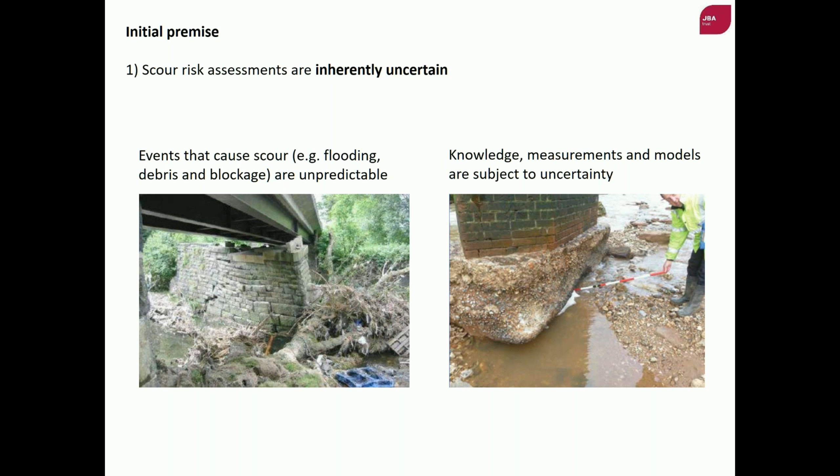A second source of uncertainty is that our knowledge and ability to measure physical parameters and processes, and model them empirically with physical models, is also subject to some uncertainty. The second aspect of our initial premise was that uncertainty manifests itself as a residual risk of bridge failures. So despite the very comprehensive protocols and actions taken to mitigate scour risk on an ongoing basis, structural failures and even collapse of bridges do still occur.

An example here is some data from the British Railway Network. This is a database of historical railway bridge failures that we published in 2014, covering the history between 1846 and 2013, where there have been around 100 documented failures of rail bridges due to scour. For many of those events, we've been able to reconstruct the hydrological conditions associated with those failures.

So two things to note from this. One is that failures have occurred even during the relatively recent past, when the industry has had well-developed and mature risk mitigation measures in place. And secondly, the trigger events, the magnitude of the event expressed in terms of the return period of the flood, is very variable across those failure events.

So there's some uncertainty clearly about how we would in fact predict a vulnerability to scour failure.

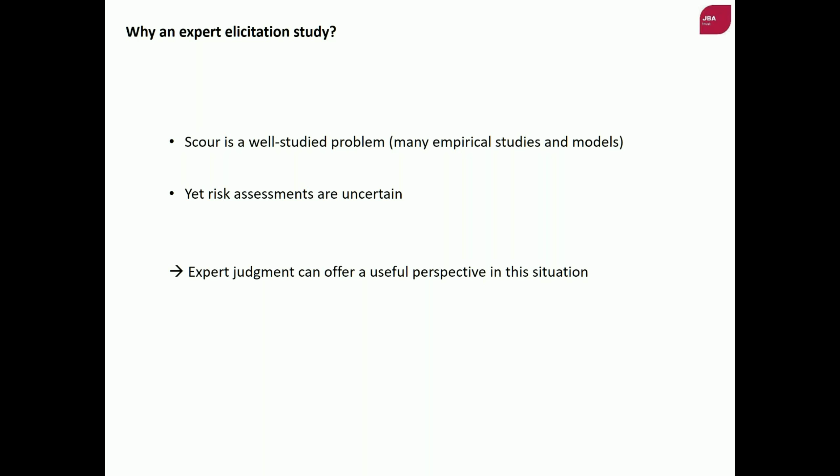This is exactly the kind of situation where we have both a depth of expert knowledge and also a high level of residual risk and uncertainty, where expert judgment has been found to offer a useful alternative perspective in addition to quantitative studies. So the methodology we adopted was a statistically robust elicitation methodology.

It was developed by Roger Cooke at TU Delft in the Netherlands, and has been applied to date in many studies, well over 80 expert elicitation studies across a range of fields, including nuclear safety, climate change, biological hazards, and so on.

Key elements of Cooke's methodology are that the judgments of a group of experts are pooled, and that pooling process, that averaging, helps to encourage robustness in the elicitation results.

And secondly, very importantly, individual experts' judgments within the process are weighted based on what can best be described as a form of calibration process.

That calibration process works in two ways. To some extent, it weights experts based on how well they answer questions that are broadly similar to the questions that are the topic of the study, and how accurate their answers are. But it also crucially looks at how good those experts are at judging uncertainty when they're not sure of the true answer to a question.

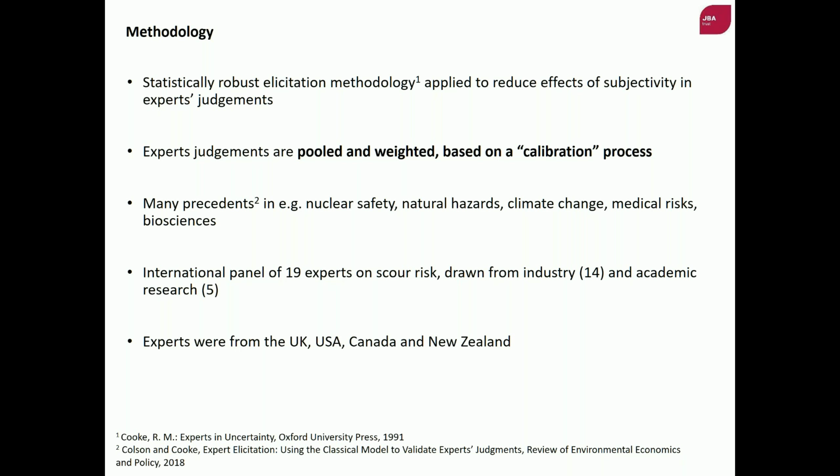So the first technical question for the experts was essentially what that load variable should be. Then we want to know what the curve itself should look like - how would it be parameterized, what shape should it have? And finally, something that's perhaps sometimes overlooked, is an assessment of the uncertainty about such a function - what could our confidence be in a fragility function for scour?

Through the elicitation process, we asked our experts about a wide range of potential risk factors that could be used as loading conditions in a fragility analysis. We looked both at piers and abutments to check for any differences that might be relevant for the two different elements of a structure.

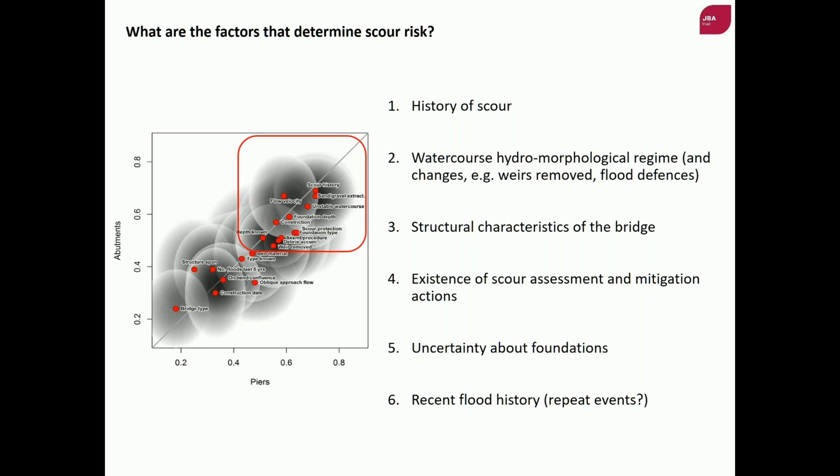The second thing that emerged as being quite important that I would draw attention to here was considering recent flood history, and in particular the occurrence of sequences of events that could cause cumulative scour damage.

From that part of the study, we then moved on to ask our experts to make some numerical judgments about failure probabilities. We gave them a set of idealized bridge and watercourse types and a series of idealized assumptions, scenarios for risk assessment and mitigation protocols. I can't show all of those results in one slide.

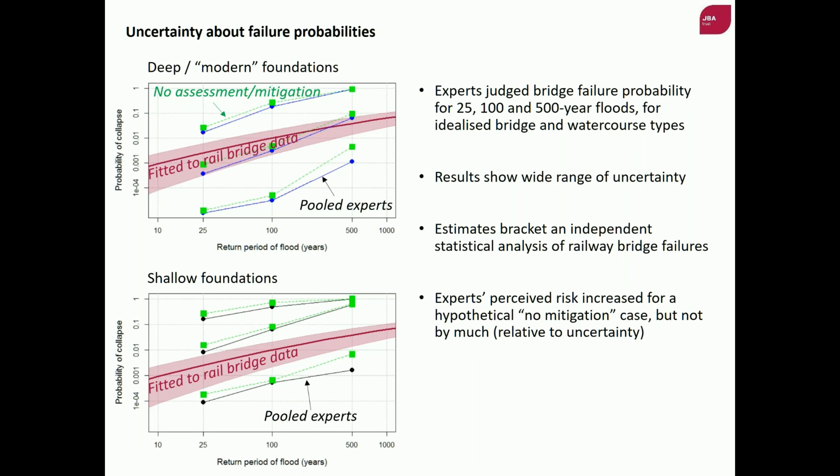So, to briefly cover the conclusions, we felt that our experts' views on potential risk factors for scour were broadly consistent with industry practice, but they did perhaps emphasise the importance of sequences of flood events and the broader hydromorphological regime of a watercourse as being important. There's a need there to think about suitable metrics that could reflect those factors within a risk assessment protocol.

They also, as I said, identified very wide uncertainties about failure probabilities, and they did that even after accounting for the presence of investments in risk mitigation and risk assessment. I think, if anything, that really just underlines the need for us to continue developing more comprehensive monitoring and assessment methods to try to constrain those uncertainties.

And to me, that's the kind of thing that I'm hoping that we'll hear about in talks in the rest of this webinar. I very much look forward to seeing the following talks. So I'll finish there. Thank you very much.

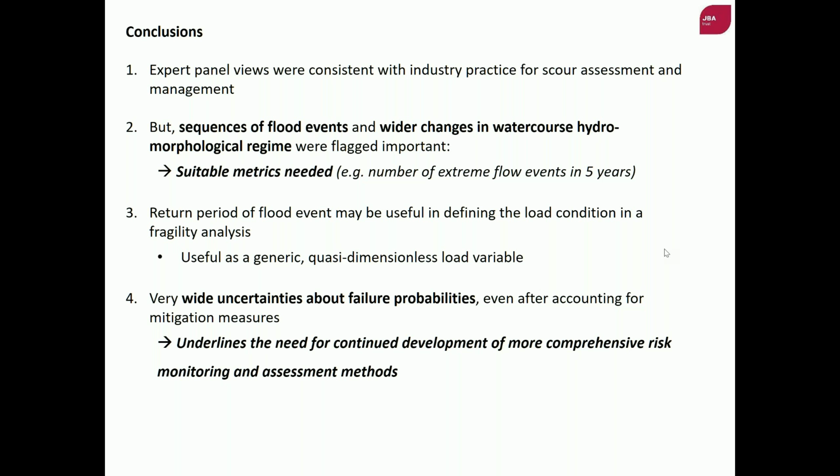Thank you, Owen, and I think this presentation will tie quite nicely into where Rob Lamb just finished there, talking about the development of novel assessment methods. The presentation I'll be giving today presents output from the Natural Environment Research Council ERIIP project that was awarded to myself and my co-investigator Trevor Hoey, and I'd also like to acknowledge John Maniatis, who was the research assistant on that project, and also Will Carroll and John Hicks at Scottish Water.

Just a very quick overview of the ERIIP programme. There were three major themes for research grants within the ERIIP programme. The presentation I'm going to give you today addresses theme one, identifying, understanding and quantifying environmental risk to an infrastructure system, and also theme three, dealing with uncertainty, particularly how we deal with uncertainty with respect to making asset management decisions. So I'll be talking today about the development of a protocol for Scottish Water's asset management of pipeline crossings.

Within the context of managing pipeline crossings, there are some broad management challenges that really cross across the whole infrastructure sector. Here in the UK, our ageing infrastructure and the associated challenges with that, extreme weather events, but also the development of novel information communication technology, the emergence of electronic asset management databases, often enabling asset inspectors to acquire data in the field using ruggedized tablet computers, acquiring georeferenced images, and also entering free text or making choices in drop-down boxes within those asset management platforms.

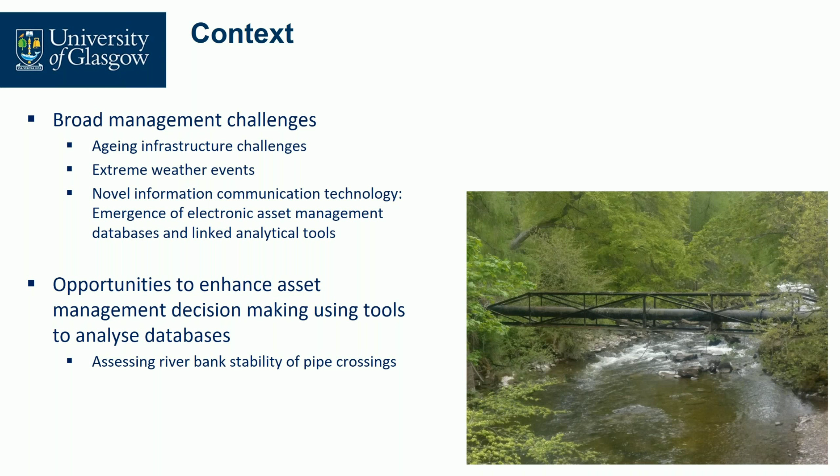Scottish Water provides water and wastewater services to 2.5 million homes in Scotland and 156,000 business properties. They've got an extensive pipe crossing network. Their drinking water network is 48,000 kilometres long, and their wastewater pipe network is 51,000 kilometres long.

River crossings within that network are essentially some of the most vulnerable nodes. They're at risk both from vertical scour and lateral bank erosion. It's the latter, the horizontal movement of rivers, that I'm focusing upon today rather than vertical scour of the river bed. We're thinking about the movement of channels left or right across the floodplain and what that might mean for pipeline crossing structures.

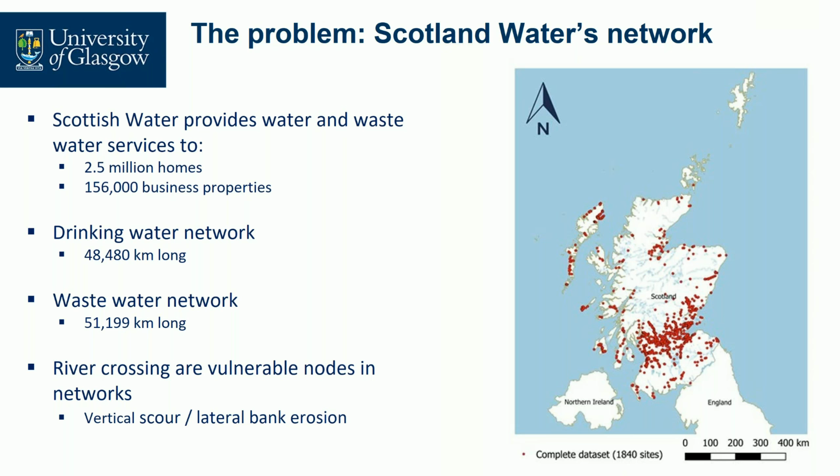I'm a fluvial geomorphologist, and the first thing to note is that in Scotland, as elsewhere, there's an incredible diversity of river environments. In upland areas, crossings might be in boulder bed or bedrock reaches. Further downstream, we might have a fluvial geomorphology predominantly characterized by actively meandering reaches.

Some of those reaches might be natural, some banks might have protection, some rivers might have been straightened. There might be cohesive bank materials such as clays, or alluvial gravels, sand and cobbles making up the bank substrate. All of those crossings cross over a whole variety of different styles of rivers, which adds to the complexity of scoring the risk associated with each crossing from a river stability perspective.

When we started this project, we looked at bridge scour assessment manuals, which tend to focus upon vertical scour rather than lateral erosion, and often characterize risk assessment frameworks for transport bridges or bridges with abutments rather than pipeline crossings, which often span right across the river, with concrete structures often set back on top of the banks, enabling the river sometimes to erode on the outer banks immediately beneath the structure.

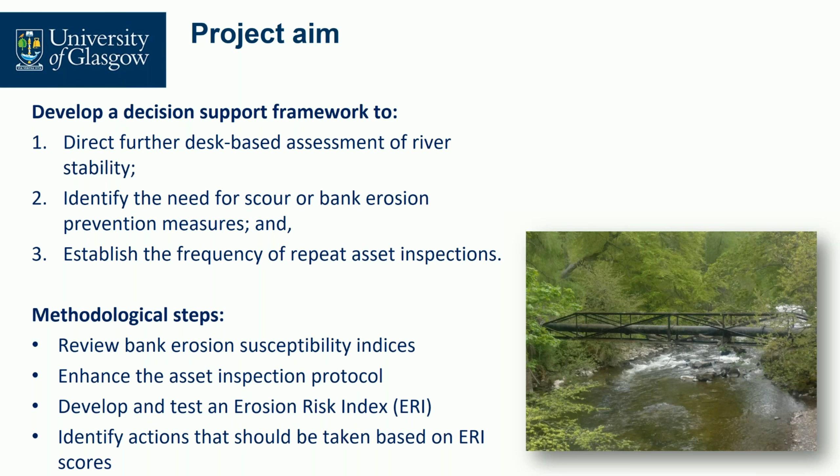As I mentioned earlier, I'm a fluvial geomorphologist. In fluvial geomorphology, a whole range of different approaches have been taken to characterize the geomorphology and the stability of rivers.

Things like Angela Gurnell's MoRPh framework, Gary Brierley's River Styles, and Tim Beechie's natural channel classification approaches are all widely used by fluvial geomorphologists, but they often require extensive information about a river catchment upstream and downstream of a crossing, and also considerable survey data in the reach that's actually of interest.

So we tried to find existing approaches that could be used to score bank erosion at a particular site. A review was completed by Connell in 2012, showing three indices: a bank erosion susceptibility index, a bank erosion hazard index, and a bank erosion potential index. All of these require a relatively high degree of input data to calculate, such as measuring the angle of a bank, using quadrat surveys to measure the distribution of vegetation, measuring root density, riparian diversity, bank material, etc.

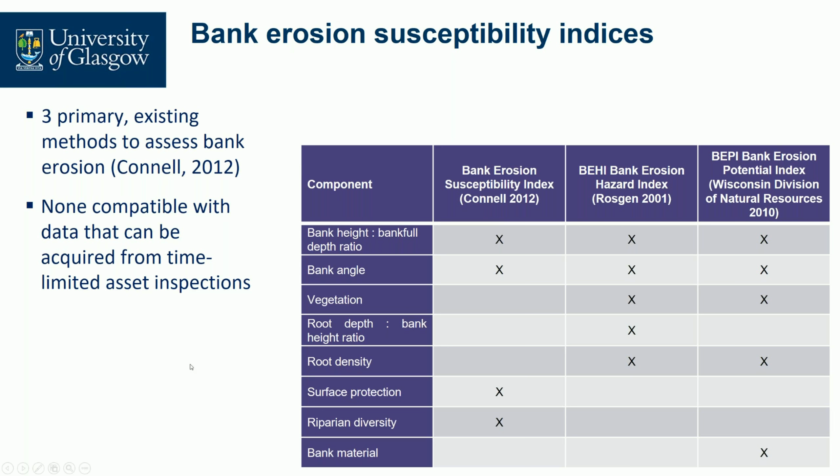So we decided that we needed to develop a simpler index that could use data that could be quickly acquired by an asset inspector within 10 or 15 minutes of arriving on site.

Initially, when Scottish Water started using their mobile app to acquire data at pipeline crossings, a lot of the photos were focused upon the structural elements of the river crossing itself. To properly assess the geomorphology of the river upstream and downstream of the crossing, as well as immediately below it, we needed to change the guidance given to asset inspectors, making sure they positioned themselves to acquire photographic coverage of the river on the left and right banks, both upstream and downstream of the pipeline crossing, as well as immediately beneath it.

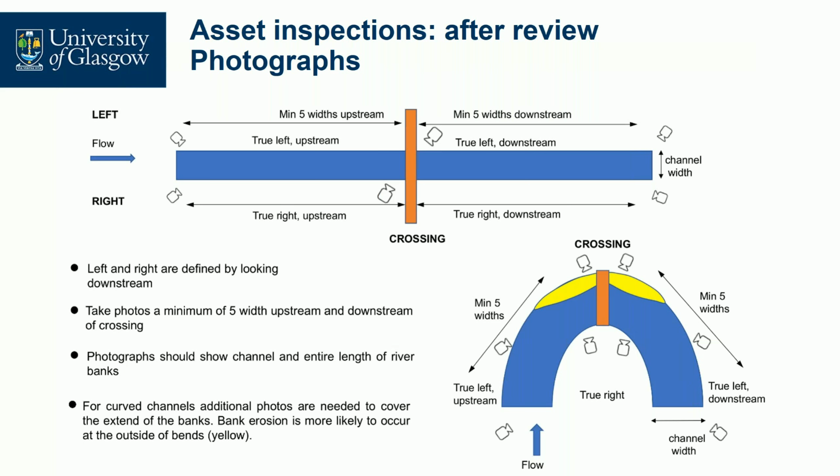This is extracted from a report we developed, showing inspectors where they should be taking images, so that we could develop a protocol to assess the coverage of vegetation and any evidence of bank erosion across that section from 5 widths upstream to 5 widths downstream, to identify whether the crossing was at risk from bank instability.

We identify whether there's active bank erosion beneath the crossing, whether there's active bank erosion upstream or downstream of the crossing, and whether bank protection exists beneath the crossing and upstream or downstream. We also identify the bank angle, and the presence or absence of vegetation, on the basis that vegetation offers resistance against active bank erosion.

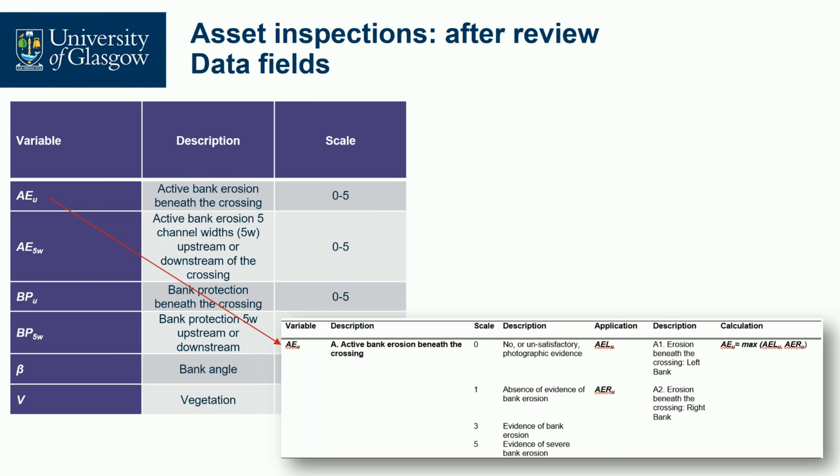For each of these variables, we developed a scale ranging from 0 through to 5, compatible with Scottish Water's existing system, and developed a procedure for asset inspectors in the office to look at the photographic evidence and rate each of these variables on this 0 to 5 scale.

The rest of our project work focused on testing a framework to determine the calculation method for the erosion risk index, and assessing whether it correctly identified high-risk sites. We then looked at whether there was user bias between people undertaking the scoring, and whether there was consistency in the methodology between desk-based inspections by asset managers at Scottish Water, experienced geomorphologists from our research group at the University of Glasgow, and site visits assessing susceptibility in person rather than using photographic evidence.

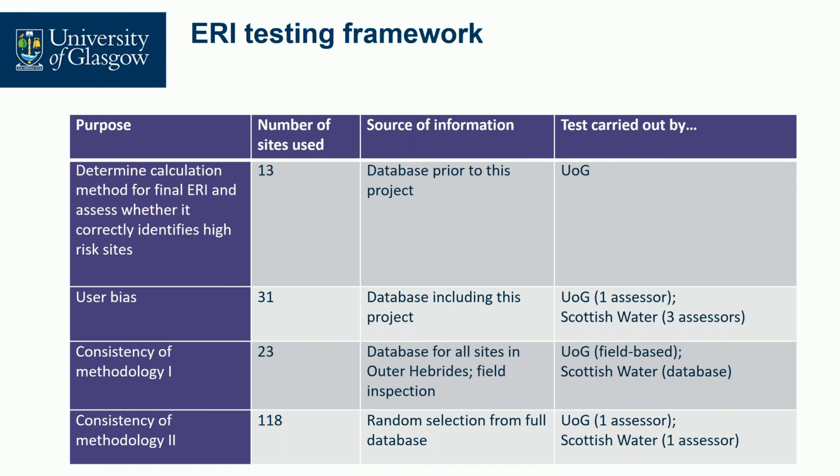We tried 4 different calculation methods for the erosion risk index: a probabilistic weighted index, a weighted addition approach, a simple multiplication approach, and a weighted scaled mean. It was that latter weighted scaled mean that performed best at discriminating between different degrees of bank erosion at different sites.

We also added a data quality element to that ERI score to ensure that where photographic evidence wasn't available, perhaps because of high vegetation or missing photos, the resulting ERI score would be sufficiently low to prompt a resurvey.

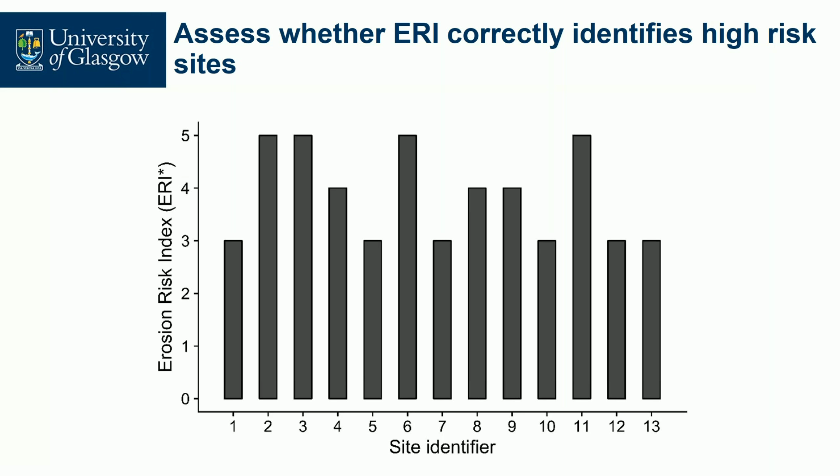Next, we're particularly interested in user bias. So we devised a method where we tested 31 sites; 3 asset assessors at Scottish Water and George Maniatis at University of Glasgow independently used the workflow to calculate the erosion risk index at each of these sites.

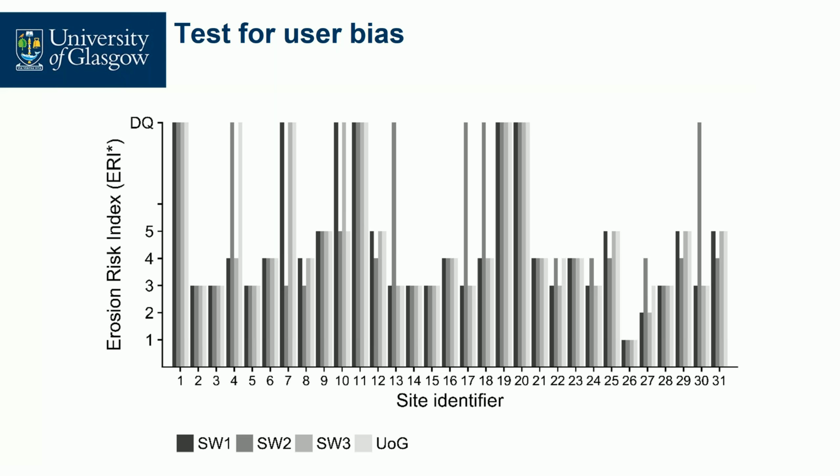From the results, we can see there's general convergence of results at particular sites, often agreement where there are data quality issues, and a lot of those data quality issues were images taken in the summer when vegetation was too high, or images that didn't show the full extent of the banks upstream and downstream.

Our final testing looked at the consistency of the methodology with field inspections. Several of us travelled to the Outer Hebrides and applied the erosion risk index methodology on site. At the same time, Scottish Water blindly calculated the erosion risk index at each of these sites for these 23 crossings.

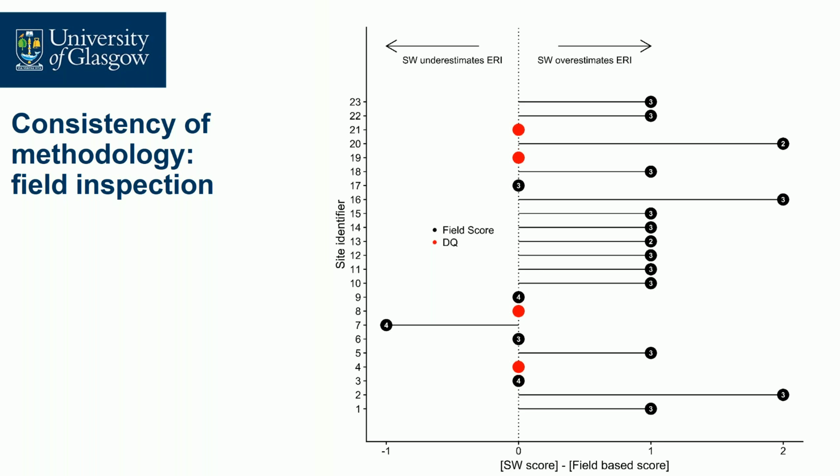The desk-based assessment overscored 14 of the 23 sites. 4 sites had the same score, and 1 site scored higher in field assessment. So if anything, the desk-based assessment is overscoring rather than underscoring, which is the direction we would want this to be in.

Our final component of testing was to select 118 random sites from the 1,500 in the database. 69 of those sites agreed between the desk-based assessment by Scottish Water and the desk-based University of Glasgow researcher assessment. 25 sites had data quality issues, and there wasn't a systematic bias for the sites where there was a difference.

The 24 sites where there's a difference of 1 in the scores - there wasn't a bias linked to the severity of bank erosion.

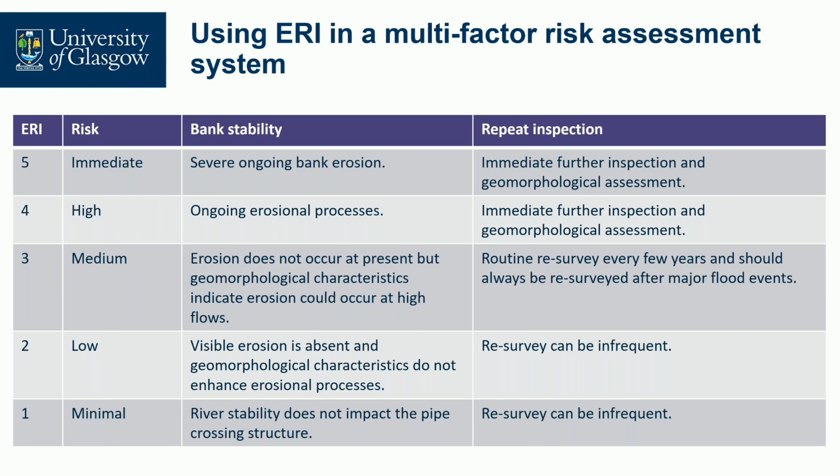So the final step was to provide guidance on next steps. Based on those erosion risk scores that Scottish Water are now calculating for all of their pipeline crossings, we decided the next steps: whether repeat inspections should be immediate for cases with severe ongoing bank erosion, or whether for sites scored 3, for example, a routine resurvey is fine. For sites scored 1 or 2, resurvey can be infrequent unless there are significant changes upstream, such as river restoration or major in-channel works that might cause instability within the river reaches.

So I'd like to finish with a note about our ERIIP project, which also enabled us to visit the Philippines and Indonesia and think about bank stability at these sites. A lot of rivers in the UK are relatively stable, but if we travel to other parts of the world, some relatively frequent floods can cause significant riverbank changes.

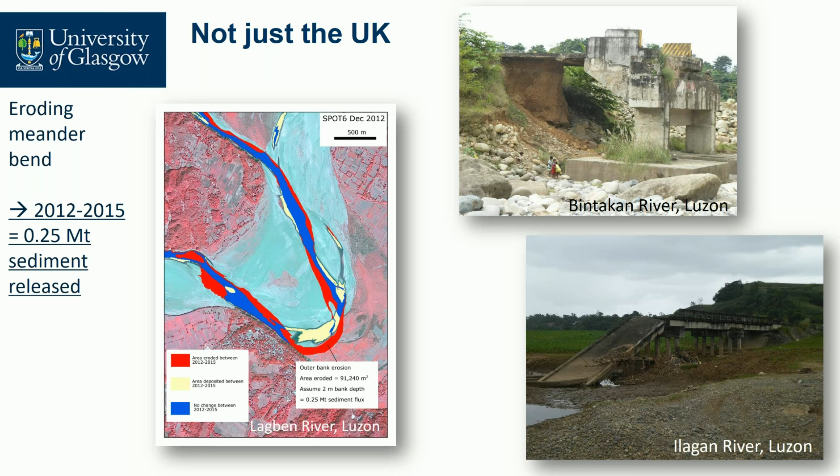So hopefully the system we've been using and developing in partnership with Scottish Water will also have relevance to other pipeline managers and infrastructure owners here in the UK, but also further afield.

I'll leave you with those conclusions on the screen, as I think I'm just out of time. We'll conclude that Scottish Water are currently implementing this scoring system within their live data capture app. So thank you very much.

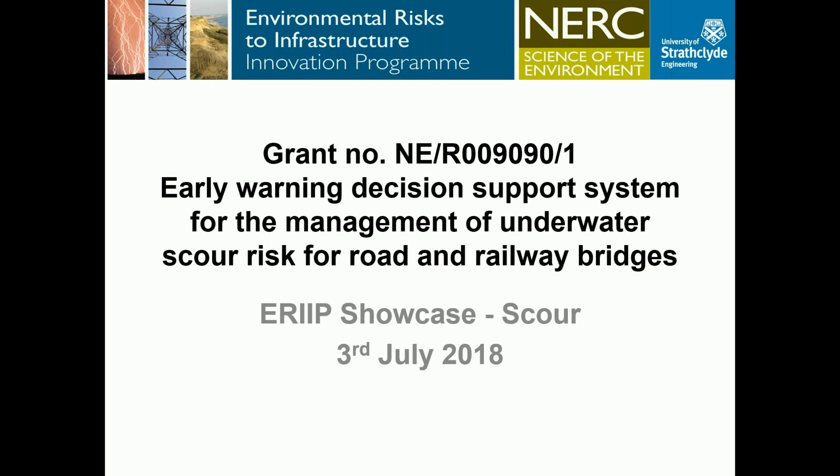In the UK, in the period 1846-2013, 138 bridge failures have been recorded, while in the US we had more than 800 scour failures in the last 40 years, which means basically 22 failures per year on average due to scour.

If we look at Scotland alone, Transport Scotland operates more than 2,000 bridges. Of those, 160 are in need of monitoring and scour protection measures. As for Network Rail managing Scotland, 1,750 bridges, and 58 of them are considered susceptible to scour.

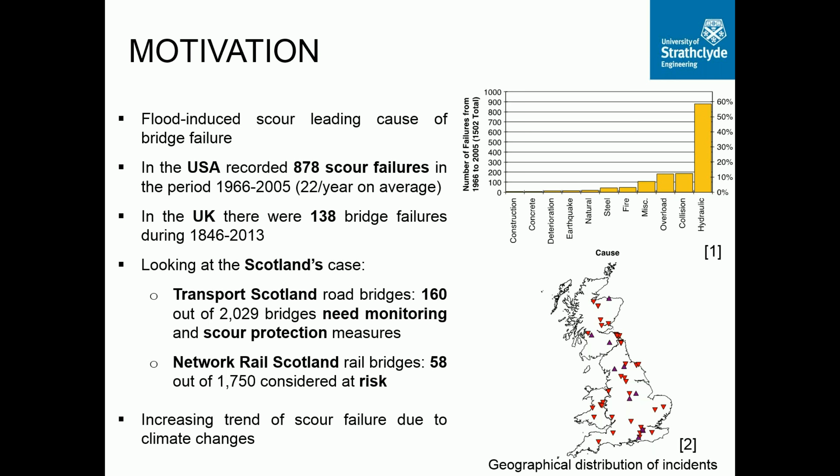Most importantly, we expect that the trend of scour failure is going to increase in the future due to climate change. And what is exactly scour, and how does it affect the stability of bridges?

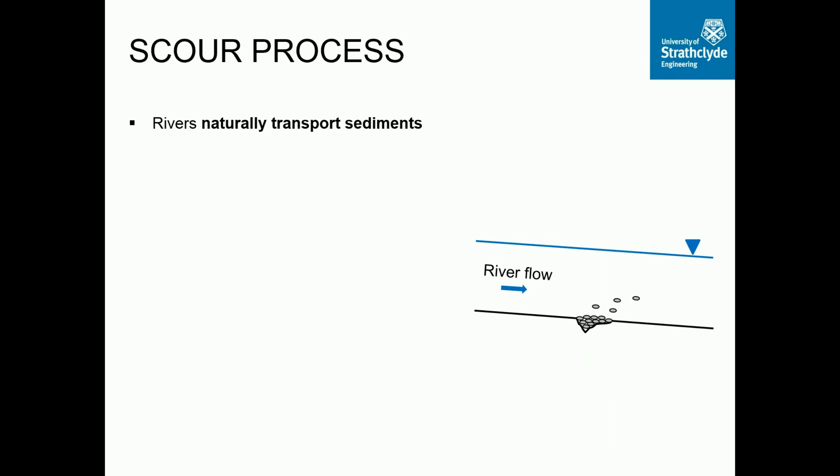Well, we are all acquainted with the scour mechanism. We know that rivers naturally transport sediment, and sediment transportation occurs when the flow velocity exceeds the critical velocity, because of a flood event or because of variation in the channel geometry near the bridge due to friction. So the local increase of velocity produces locally a removal of sediment, what we call scour.

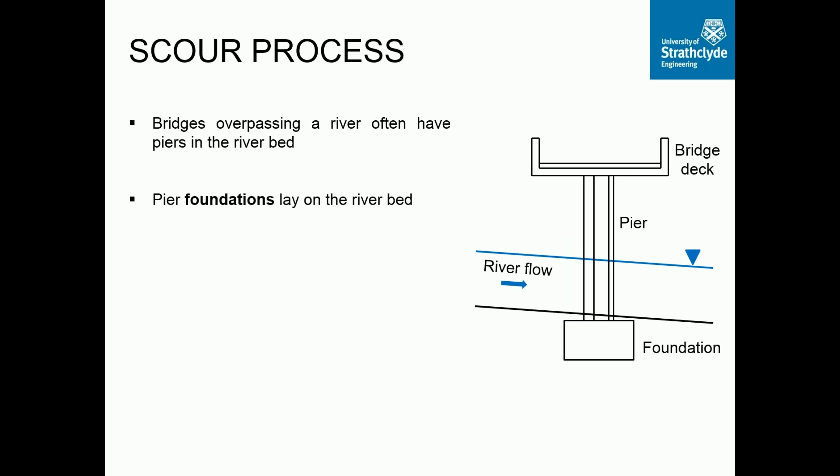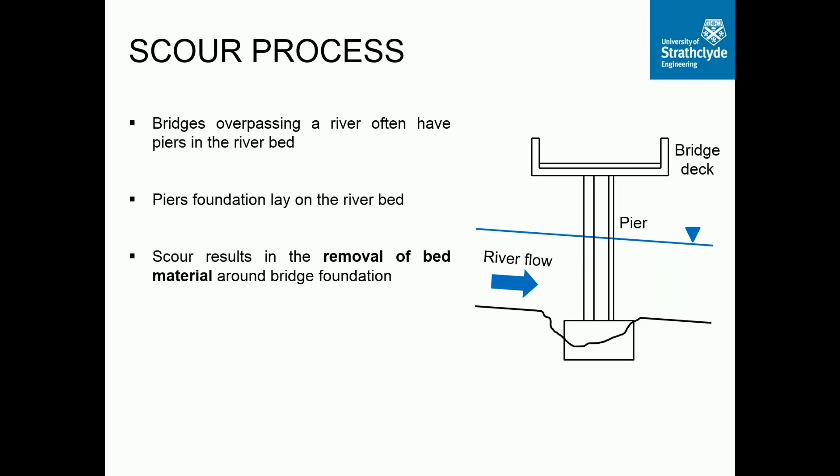Bridges crossing a river often have piers in the riverbed, and the pier foundation very often, especially for old bridges, lies directly on the riverbed. So scour results in the removal of bed material around the bridge foundation, and as the scour grows, this may jeopardize the stability of the bridge and ultimately produce the collapse of the bridge.

Examples of bridge collapse that have occurred in the UK and Ireland in recent times include the Glanrhyd Bridge in Wales in '87, the Northside Bridge in Cumbria in 2009, the Malahide Viaduct in Dublin in 2009, and most recently the Lamington Viaduct in Scotland in 2015.

So it is fundamental to understand what the scour depth is, in order to prevent possible scour failure in our bridge network. So how can we prevent and assess the depth of the scour?

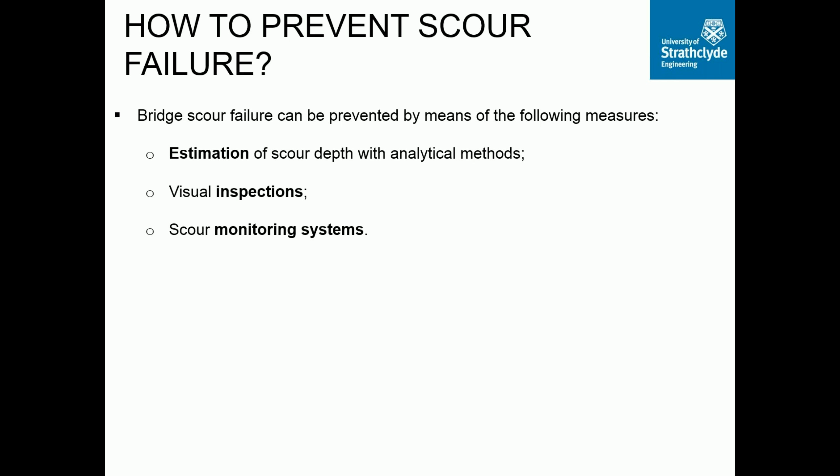The simpler approach is to try to estimate a priori what the scour depth is, using analytical methods. In addition, we can use visual inspection for directly assessing the scour depth, or we can use a monitoring system to do the same. For example, Transport Scotland and Network Rail use their own procedure to calculate analytically what may be the scour depth following an extreme event.

These procedures are, for instance, the BD 97/12 for Transport Scotland and the EX 2502 for Network Rail. Both procedures are ultimately based on CIRIA recommendations for scour evaluation and include two levels of assessment.

At the first level, the logic is to identify those structures which are susceptible to scour and those that can be excluded for scour risk. At the second level, for those structures that are susceptible to scour, there is a formal calculation of the possible scour depth that has to be compared with the foundation level.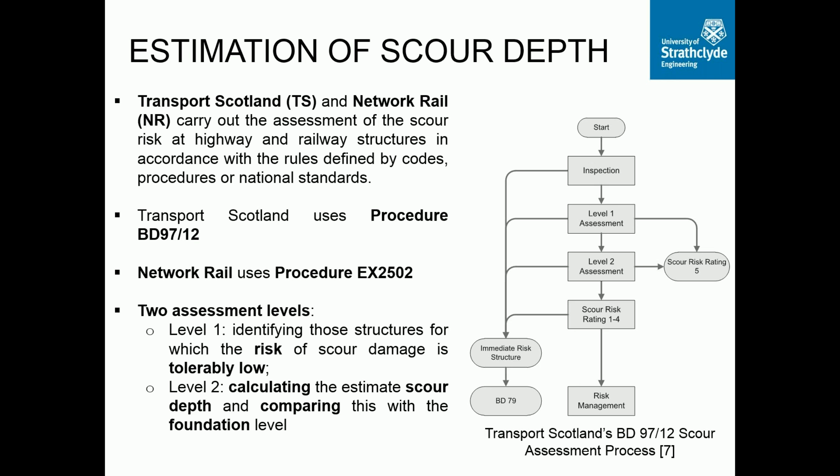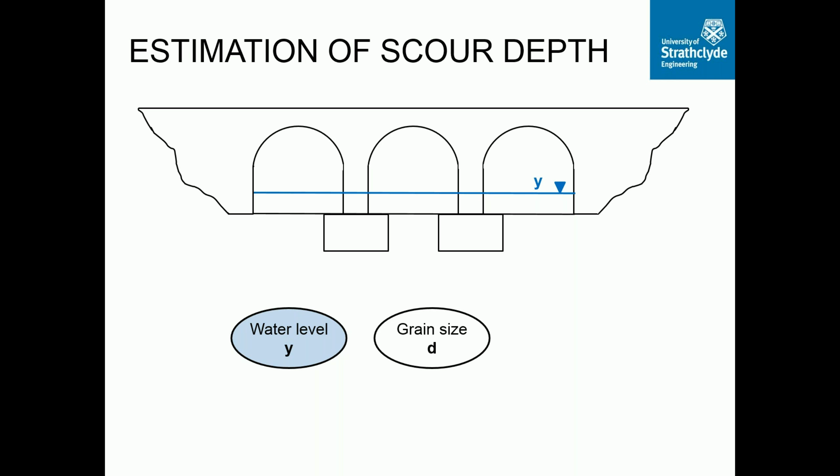Of course, this calculation is very uncertain and is based on a number of pieces of information about the bridge geometry, the flood event, and the riverbed. Typically the information that feeds this model is the water level and the grain size of the riverbed, and based on that we try to make an estimation a priori of what the scour depth D is.

Of course, this estimation, as Rob Lamb has clearly reminded us in his first presentation, undergoes a very strong uncertainty, and this model has inevitably a big error of estimation. So what can we do to improve this estimation?

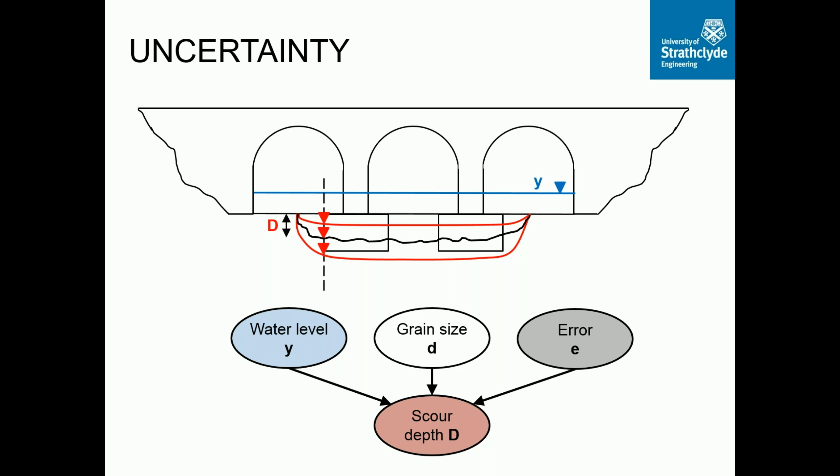Of course, the transportation agency typically resorts to visual inspection, and for those bridges that are really susceptible to scour, the agency routinely inspects its assets for scour, but this requires underwater or dive inspection.

Now, underwater inspection has some drawbacks. First of all, it is very expensive. It's also very time-consuming, and most importantly, it cannot be carried out during a flood event because of safety reasons.

So, Transport Scotland, for example, currently spends something in the order of 2 million per annum on routine inspection of bridges, while Network Rail in Scotland alone spends 0.4 million per annum.

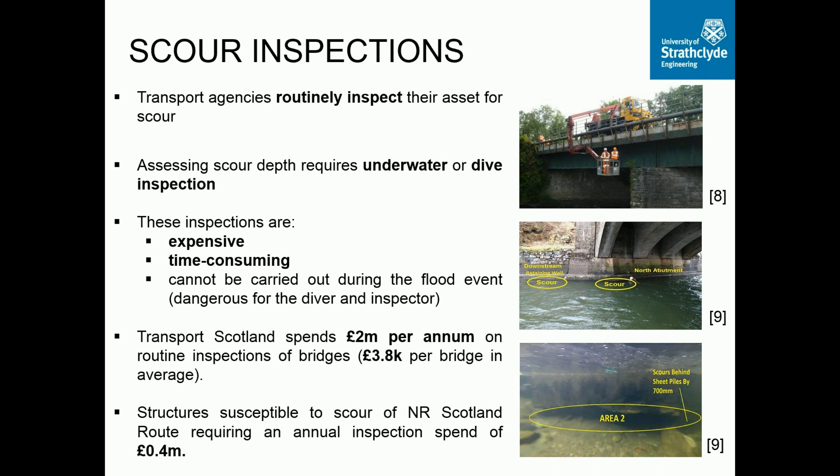Basically, this sensor detects the magnetic permeability of the soil, or the electrical permittivity of the soil surrounding the sensor, and allows us to distinguish between the soil media, the water, and the soil deposition. So in principle, we could think to install one of these sensors at each pier site in order to detect in real time what the scour level is.

The only problem here is that monitoring every pier of every bridge in a stock is not economically sustainable. So the objective of our project is to develop a scour hazard model which is able to estimate the scour level at different locations, taking advantage of real-time information from a scour monitoring system.

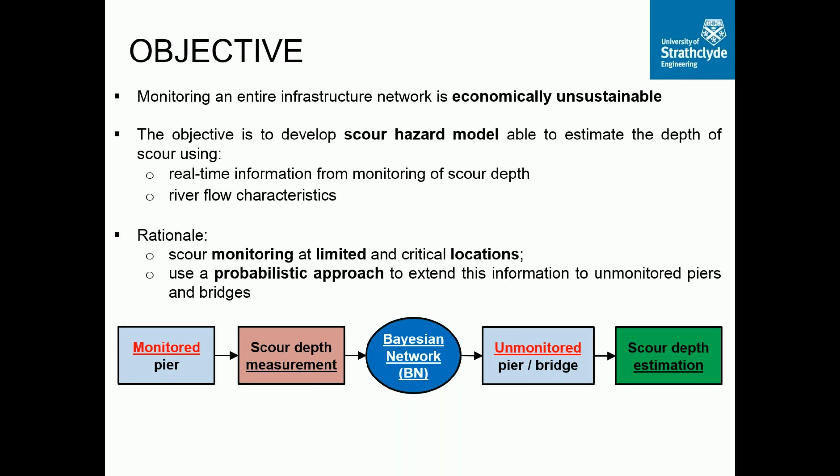The rationale here is: let's install the monitoring system only on a limited number of critical locations, and then use a probabilistic approach based on a Bayesian network to extend this information to unmonitored bridges and piers. So what is the rationale of this approach?

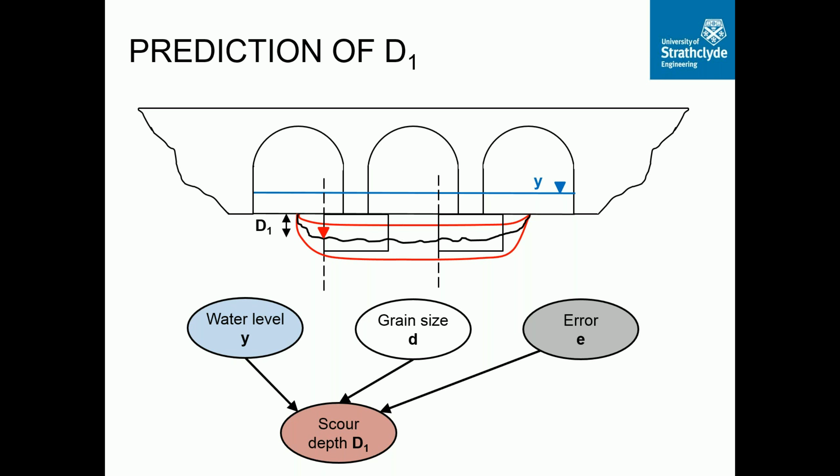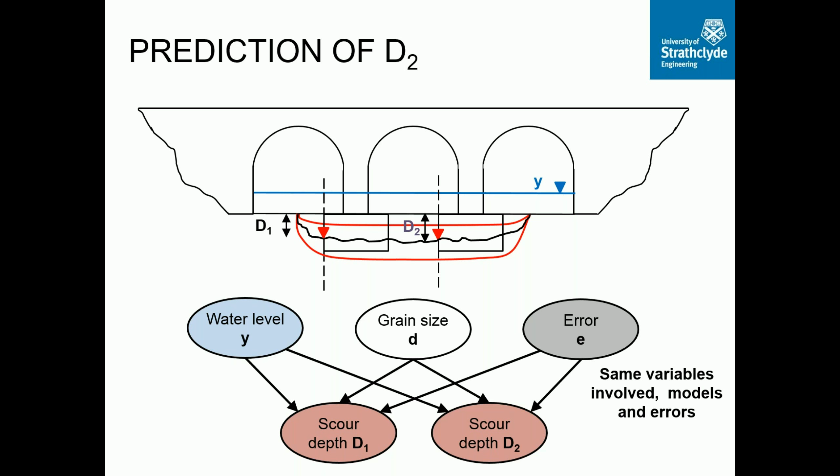We've seen that if we want to predict a priori the scour level based on the water level and the approximate knowledge of the grain size, we need a prediction model, which is typically what Transportation Agencies normally use. Imagine a bridge with two piers in the riverbed. D1 and D2 are the two scour levels we expect. Just as we estimate scour depth at one pier, we can apply the same procedure at the other pier, because the two quantities are correlated through the water level, the grain size, and also the error involved in the model, with some correlation between these two quantities.

Now imagine we install a monitoring system on one of the two piers. In this case, during a flooding event, we can measure the depth of the scour directly. So we don't have uncertainty anymore — we have a deterministic value of the scour level.

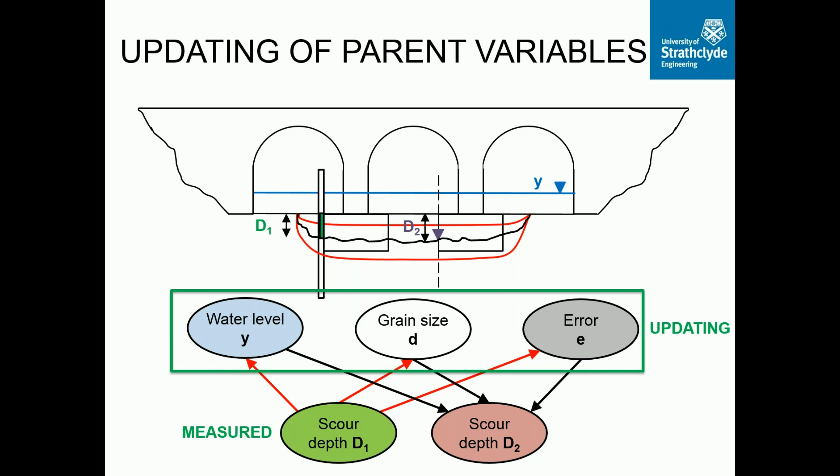With this information, we can update the parent variables used for this model: the water level, the grain size, and more importantly, the correlated error of the model. Using these updated variables, we can recalculate the second scour level, which in this case will give a different value, but most importantly, a much smaller uncertainty.

So the logic is: if we have two piers on the same bridge and we observe one of them, we can get a much better estimation of the other pier, even without installing a monitoring system directly on it. We can extend this logic to any bridge stock by highlighting the variables that allow us to correlate the models predicting scour.

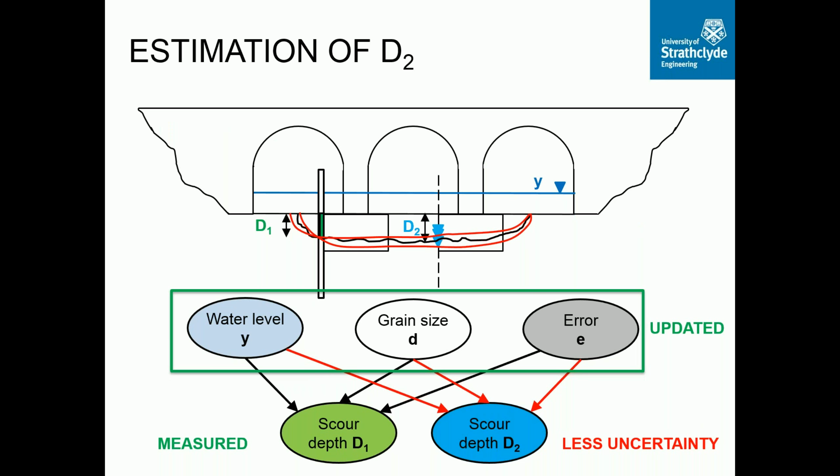This logical correlation is embedded in the model that we call a Bayesian network.

Let's see what happens when we apply this to a real-world case study. For this project, we investigated a pilot network consisting of 3 bridges managed by Transport Scotland: the A76-200 bridge near New Cumnock, the Guildhall Bridge, and the Dalscone Bridge. They are all located in southwest Scotland over the same river, the River Nith. Being on the same river allows us to assume a correlation in the riverbed sediment, and we use this to extend information from one bridge to the others.

Let's analyze the 3 case studies. The first is a 3-span stone masonry arch bridge with 2 piers in the riverbed and a superficial foundation. This bridge is used by Transport Scotland as a pilot site for testing the scour-line monitoring system, and one of the 2 piers is going to be monitored with a sensing probe.

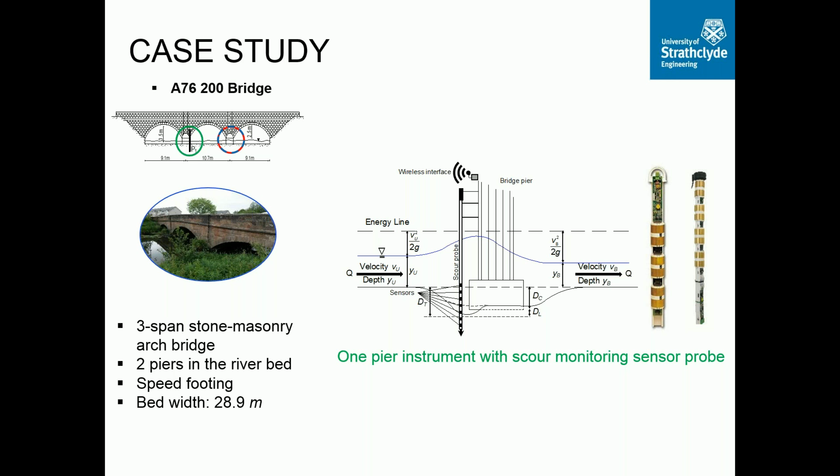The second bridge is a 3-span stone masonry arch bridge with 1 pier in the riverbed. It's being refurbished with a concrete deck, and the bed width is 21.4 meters. The third bridge, the Dalscone Bridge, is a 7-span steel-concrete composite bridge with 1 pier in the riverbed, with a deep foundation.

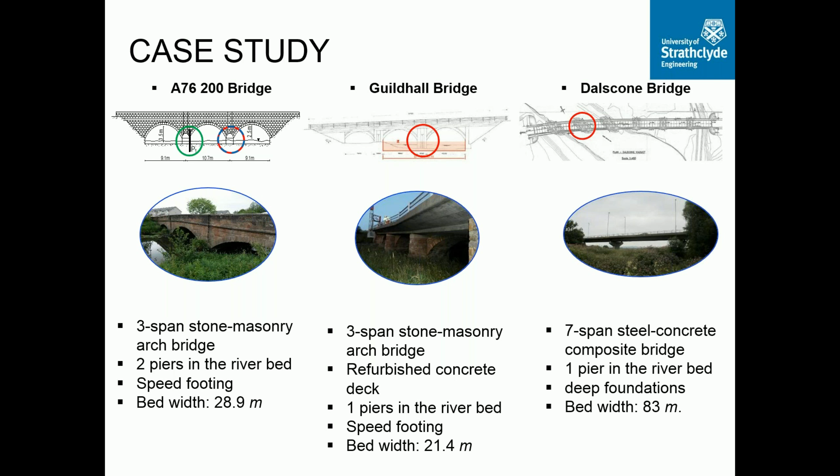If we model the mutual correlation between the different quantities of these 3 bridges, we end up with a Bayesian network similar to the one shown in the picture. In blue, we highlight information we can assume a priori, for example the flow during a flooding event, and in green are the quantities we observe during the monitoring process. For example, we can observe at the A76 bridge the actual scour level at one of the 2 piers, and we can also observe, at a different location of the network, the water level.

Using this information, we can back calculate and make a prediction using this network. Once we have some direct observation of the scour level, we can use the process shown before to recalculate the scour depth even in locations that are not directly monitored by a monitoring system.

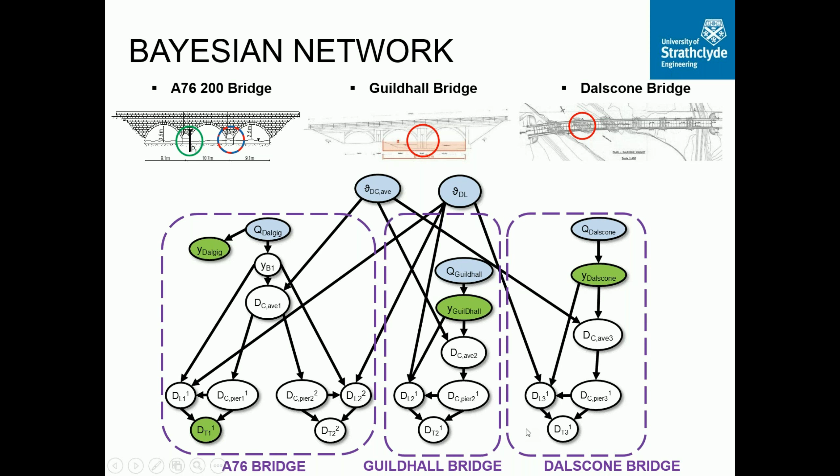Okay, let's see what happened in a simulation. Let's use this model to try to predict the scour level for a particular event. The prediction of the scour level is typically very uncertain. For example, in the case of the New Cumnock Bridge, we can expect for a particular event a total scour depth in the order of 2 meters with a standard deviation of 0.7 meters, which is a very huge uncertainty. Similarly for the other bridge, for the same event, we can expect a very large uncertainty in the scour estimation.

Now let's say that the New Cumnock Bridge is monitored, as it actually is, with a monitoring system on one of its two piers. This monitoring system records a total scour depth during the event of 0.45 meters, 45 centimeters. So, of course, for this particular pier, we know exactly what the scour level is. But what can we say, for example, for the nearby piers on the same bridge?

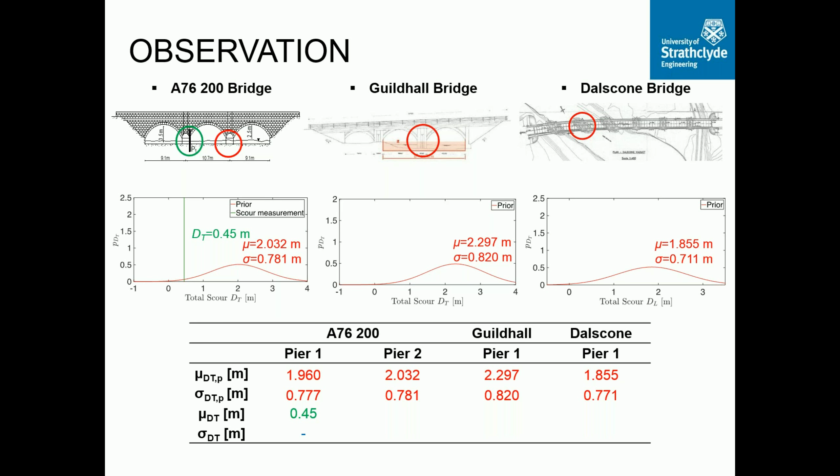If we back calculate using the Bayesian network seen before, we can update the distribution of what the actual scour level can be on the other pier. On average, we can guess that the total scour depth in the other pier is in the same order, but with a smaller uncertainty. So our estimation is 45 centimeters, for example, with a 20 centimeter standard deviation.

Using the same network, by taking advantage of the correlation in the riverbed sediment, we can also try to guess probabilistically what the scour level is in other locations. For example, for the Guildhall Bridge, the estimation shows a total scour level of 0.9 meters with a standard deviation of 25 centimeters, and for the Dalscone Bridge, 79 centimeters of scour with a 25 centimeter standard deviation.

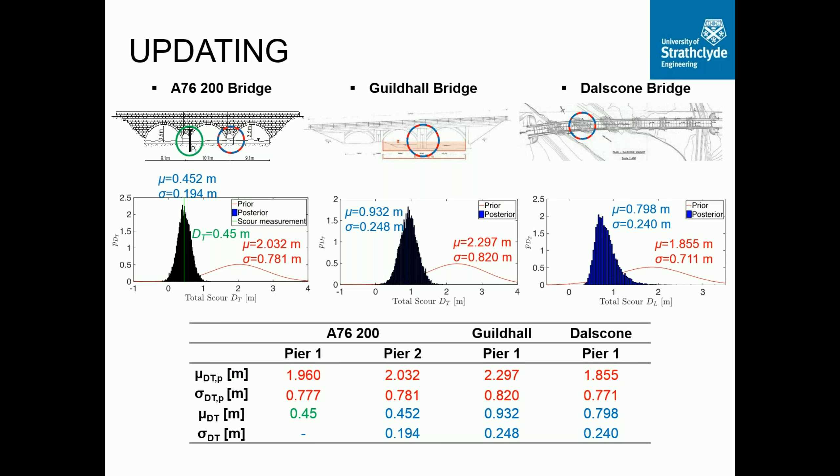What is most important in this approach is that even if we are not monitoring directly the scour level in this bridge, using the correlation with the other bridge, we are able to reduce the uncertainty of our estimation. So in conclusion, in principle, a monitoring system would allow us to detect the scour depth at any location, but clearly monitoring an entire bridge stock with all bridges and all piers is not economically sustainable for a transportation agency.

So we proposed a system based on a Bayesian network, which is able to estimate and understand the scour depth by monitoring only a critical location. When we observe a particular scour realization at a particular location, we can spread this information across the network, and so we can estimate the scour depth with some uncertainty even in unmonitored bridges.

We demonstrated this approach on a case study of 3 bridges managed by Transport Scotland in southern Scotland over the same river, and the observation from the monitoring system increased the accuracy of our estimation even in the unmonitored bridge, and this increase in accuracy is in the order, in our example, of 70%. So this framework can, of course, be extended to any bridge stock of any size and for any transportation agency.

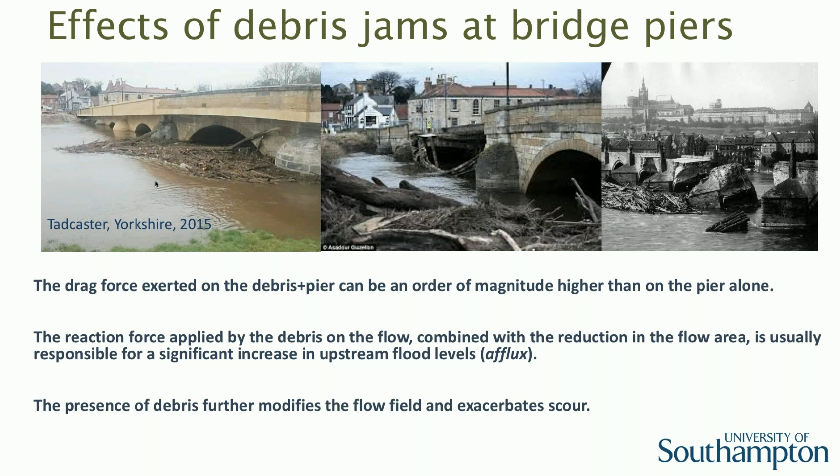I would like to highlight that studies in the UK and the US estimate that about one third of all bridge failures that occur, mainly in the US and the UK, are somehow related to the presence of debris accumulations. This is a problem that involves a high level of uncertainty, as has already been mentioned here as well.

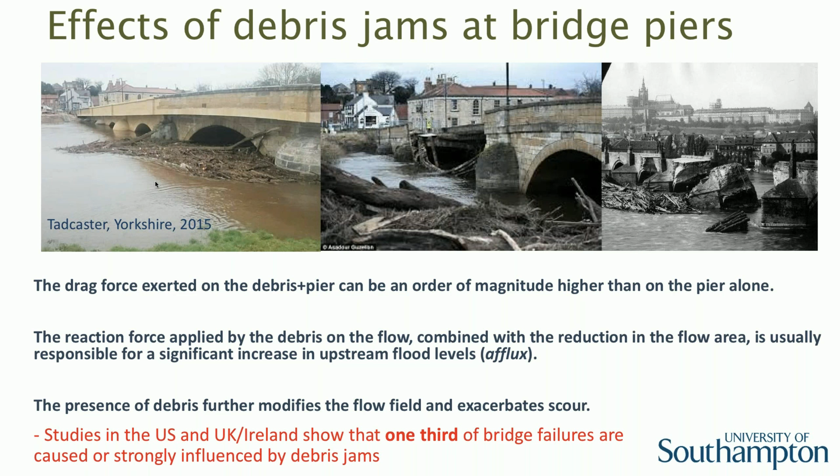But I think most of this uncertainty is because until recently, we didn't have a way to estimate or have any guidance about what size or dimensions these debris accumulations could reach during a flood event. This has been addressed in one of our research projects here at the University of Southampton that has been going on for the last 4 years, where experiments like this have been conducted, trying to understand the process of the formation of the debris accumulation itself, rather than just the effects of a given debris accumulation on scour or afflux.

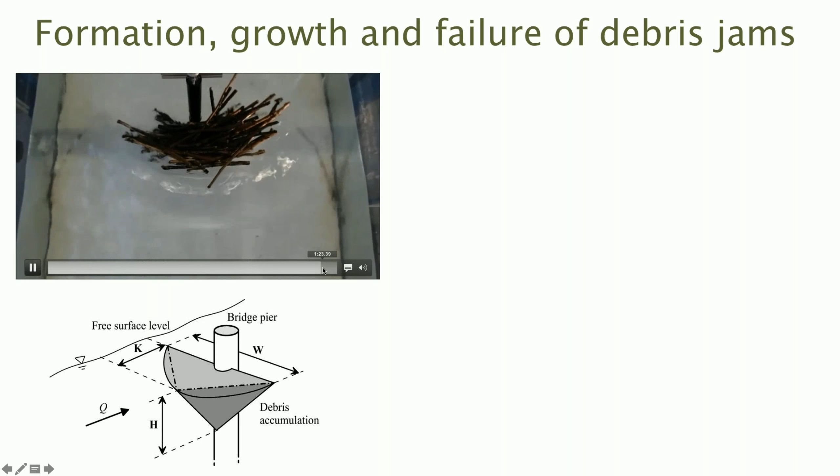By performing many of these experiments, we managed to reach these curves here that represent the 3 variables characterizing the geometry of the debris accumulation: the width, the depth, and the length along the river, as a function of flow variables, in this case a Froude number, and also the characteristics of the debris supplied to the channel. Summarizing these components of this research, these experiments, more than 800 experiments, now allow us to predict the worst case scenario given flow conditions and some characteristics of the channel and the oncoming debris transported by the river.

This now allows us to provide a better assessment of those 3 components that I described before, because knowledge about the dimensions is key to assess each of those effects of debris accumulations on those 3 components.

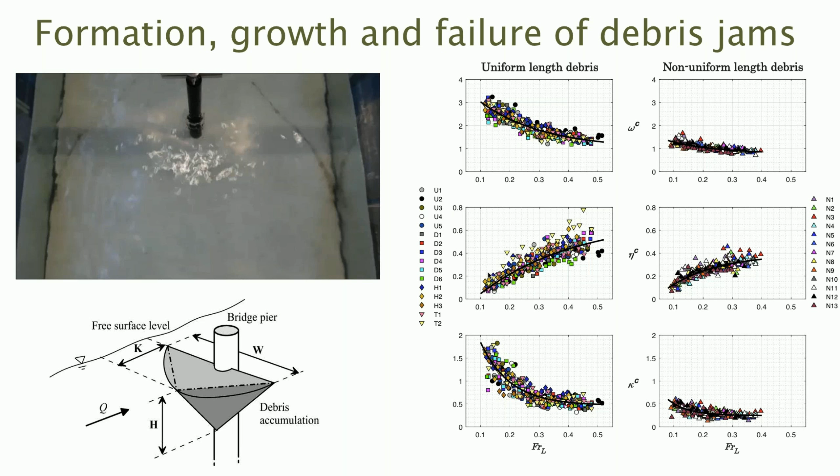Starting with the problem of lateral loadings, that is simply governed by a drag force relation. The main unknown in this problem is the area, the blockage area, that is this variable here, and the coefficient of drag. If we know these 2 components, we can easily address the problem of lateral loading driven by debris. This can now be assessed by these relations that we are providing for the width, the maximum width that accumulation can produce.

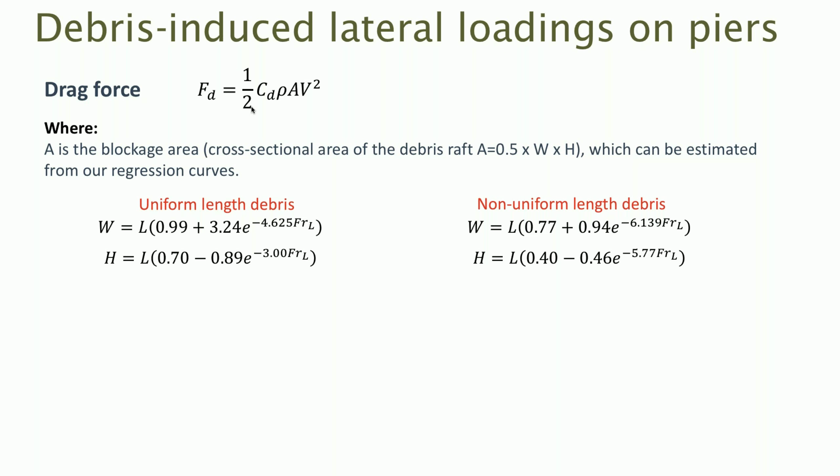And the depth of that accumulation, for both natural debris and for debris composed of elements of just a single length. As part of these experiments, we also actually measured the forces that were being exerted on the piers. This allowed us to derive an experimental, empirical value for the drag coefficient of these very irregular and porous media, which is difficult to estimate only from theoretical considerations.

So we are now able to provide an assessment for the drag coefficient as well, and we close this problem of assessing lateral loadings on bridge piers.

The second component, which is the problem of assessing scour driven by debris, has been studied before, but I think the main limitation of previous studies is that they had to assume given dimensions and shape of the debris accumulation and perform experiments that would tell us how much scour is increased by the presence of the debris.

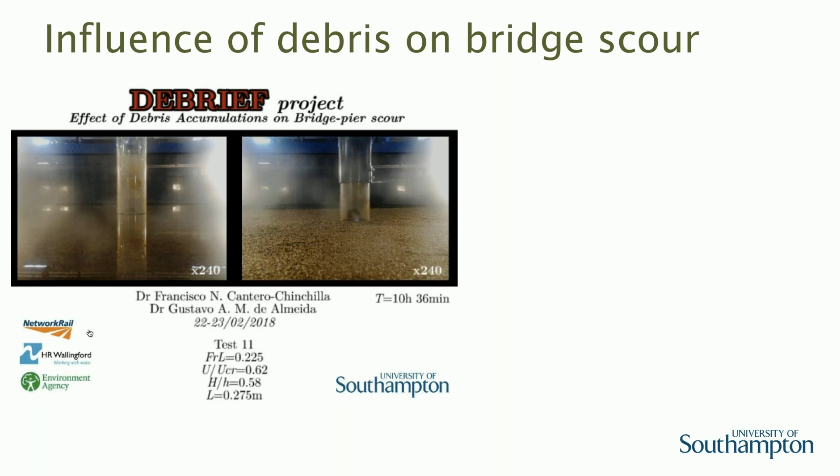This has led to estimations of up to 4 or 5 times the scour depth that would occur without the debris. Our experiments, performed as part of this project, are shown here on this video, where you can clearly see a higher scour depth occurring for the experiments with debris relative to the scour without debris.

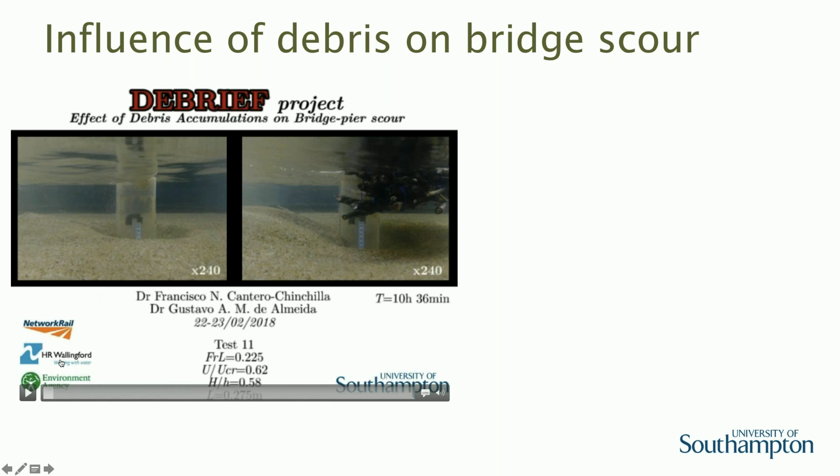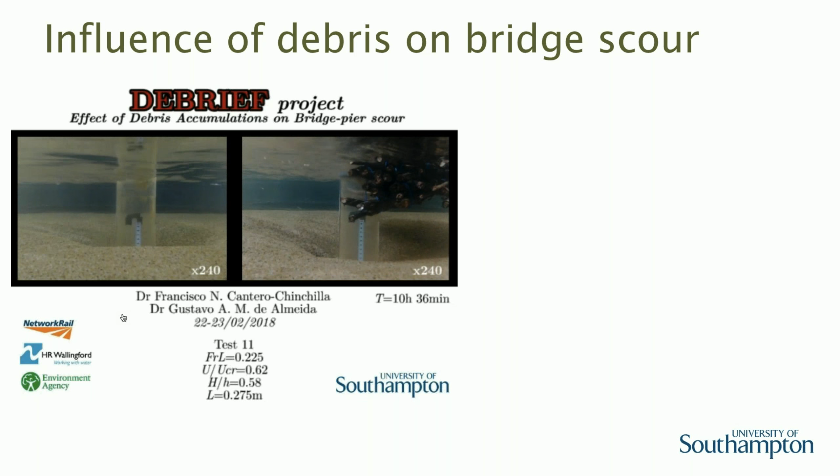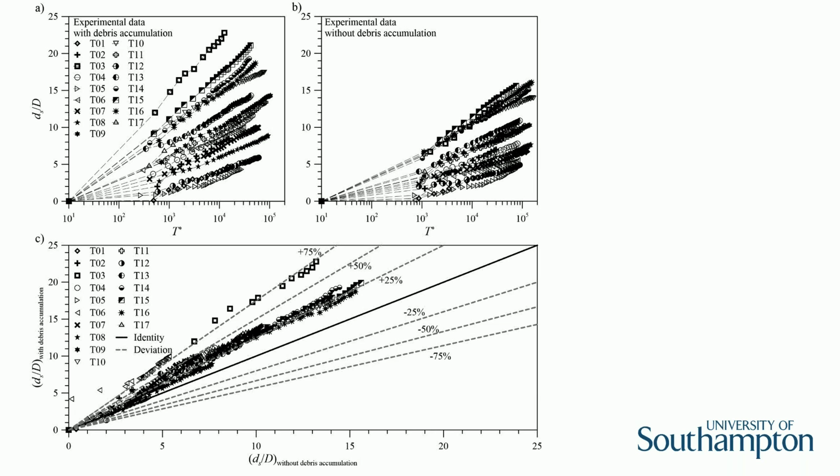A third element of the project was to develop or improve a methodology to assess the influence of debris on afflux. This too can be defined from a purely mechanistic perspective using conservation of momentum or conservation of energy, but a key component in these equations is the actual force that debris exerts on the flow. This is linked to the drag force exerted by the debris accumulation, which depends on the size of the accumulation—the main unknown so far.

So these experiments now allow us to perform a better assessment of this component of the equation, leading to more case-specific and hopefully more accurate predictions of afflux. The initial idea of this project was to incorporate this knowledge into the Environment Agency's afflux estimator.

We worked together with HR Wallingford on this potential implementation, but during the project they highlighted that the technology had been developed almost 20 years ago, and they were finding it difficult to compile those source codes or even find parts of them. So we decided to develop our own standalone version of a debris-induced afflux estimator, which we'll make available as part of the project outcome.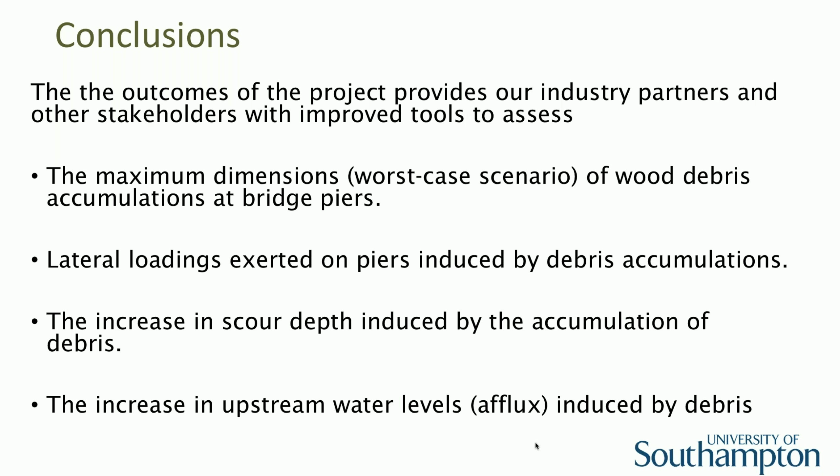To conclude this presentation, I'd like to highlight that the outcomes of this project improve the tools available to assess the components listed here: the assessment of maximum dimensions of wood debris accumulations that can occur at particular bridge piers given flow and debris characteristics; lateral loadings exerted by these accumulations on bridge piers; the increase in scour depth caused by debris blockage; and finally afflux, the increase in upstream water levels driven by these accumulations.

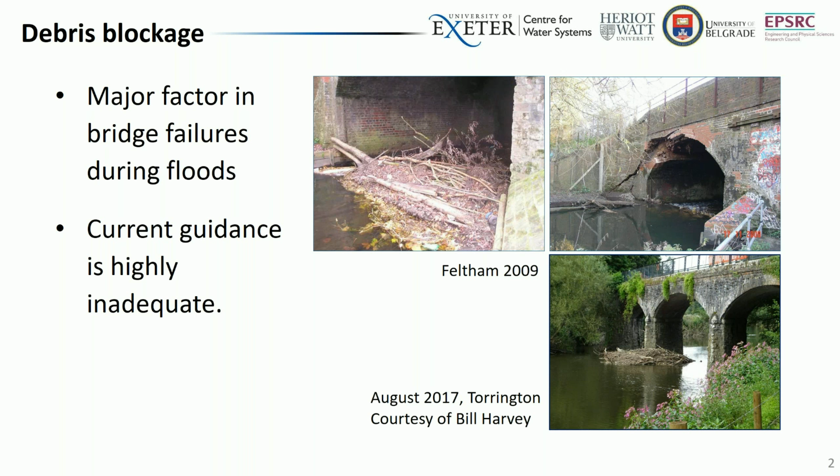So we led a proposal with Heriot-Watt University, University of Belgrade, and a number of industry partners who I'm not quoting here, but it includes Bridge Owners Forum, Adept, Jeremy Benn Associates, Mott MacDonald, a lot of people who were on the steering committee for the CIRIA C742 document, because this was put together pretty much at the same time the revision happened about 3-4 years ago now.

So the main motivation was to understand the science describing the characteristics of flow, flow behavior around debris. We were particularly focusing on masonry bridges because I think debris accumulation is particularly serious in masonry bridges and bridge piers because they are chunkier, thicker. We are also looking at masonry arches in particular as well.

So we are also looking at hydrodynamic effects on masonry arch abutments as well as on inundation. And a key part of the proposal was to take forward the findings and integrate it within an approach for assessing bridge risks to hydraulic action. Specifically, we are aiming to embed this within the C742 guidance in some form at a later stage.

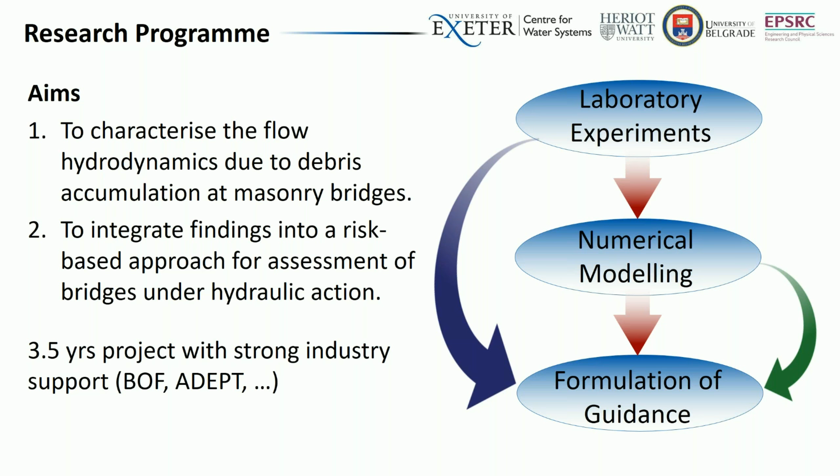The project essentially consists of a number of laboratory experiments in the fluids lab we have here. We are also doing a lot of numerical modeling, CFD-based modeling, and eventually taking forward results from both into creation of a guidance. So in this presentation, I'm going to skim over the science bits. I'm not going to talk much about the experiments or the modeling. I'm going to focus more on the guidance bit, or what we are proposing to do.

So just to give an idea of the kind of experiments we're doing, it's similar to what Gustavo mentioned. We are not simulating debris formation. We are actually using solid objects for debris. We took our information based on publications in the US and in Europe, including the UK, where there have been extensive studies on how debris accumulates in structures, purely based on data gathered on debris accumulation at structures. And we have done a number of experiments in the lab.

We are particularly looking at low flow conditions. So we are not looking necessarily at flood conditions. The Feltham Bridge failure, for example, was not during a flood alert. The failure happened when there was no flood alert. It was not really very high flow in the river, but the scour happened due to debris in that scenario.

And notably, we are using a wedge-shaped pier rather than a circular pier. We're using a wedge-shaped pier because we understand typical masonry piers tend to be rectangular with cutwaters at the two ends. So this is representative of a typical masonry bridge pier.

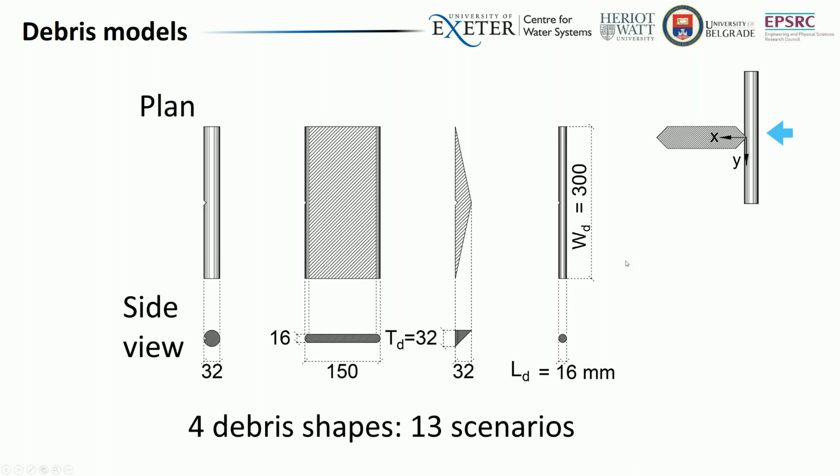So we also have done CFD modeling, like I mentioned. The purpose of the CFD modeling is essentially to validate some models using laboratory results, and then use the models to run scenarios which are not possible to do in the laboratory. In the laboratory, we're constrained by limits on discharge that we can simulate in the flume, as well as constraints of scaling. But in the CFD, you can, on paper, run it at full scale, even though it's computationally intensive. In terms of time, it may be faster.

So our goal is to actually take the laboratory results, calibrate a few CFD models using the data, and then use the CFD to extrapolate for a wide range of scenarios.

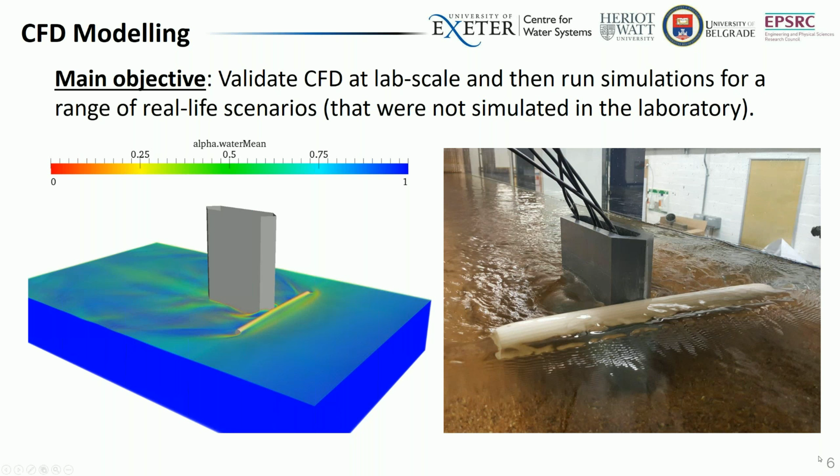And we have calibrated our CFD models. This is just a picture showing that the CFD models free surface flow. We have done a two-phase simulation, including the free surface, and we're able to match free surface profiles, both from laboratory conditions and CFD. They are consistent. We're also able to match velocity data. So we have taken velocity data from the experimental setup and we're able to match it with CFD predictions, and it's surprisingly very close. So the CFD models come very close to predicting measured conditions, actually.

And so we are able to use the CFD models to go off and do simulations for a different number of scenarios, especially looking at debris geometry, looking at angle of attack, because almost all the experiments we do in the lab are basically with the pier perfectly aligned with the channel. But we know that in real life, it's hardly the case. And we're also able to run with bigger blockages than we probably wanted to do in the flume because of wall effects coming into play.

So I'm not going to focus on that, I've skimmed over that bit, but I think what is more interesting for you probably is what we want to do using the data. So our aim is to make an impact on the C742 guidance.

I think for bridge engineers here, you may recognize the equation. That is the equation by Breusers, that is referred to in the C742. Currently, this is the equation that is used to predict scour, or estimate scour. It consists of a term capital D, which is the pier width, times a number of factors to take into account different parameters, the shape of the pier, the flow depth, etc.

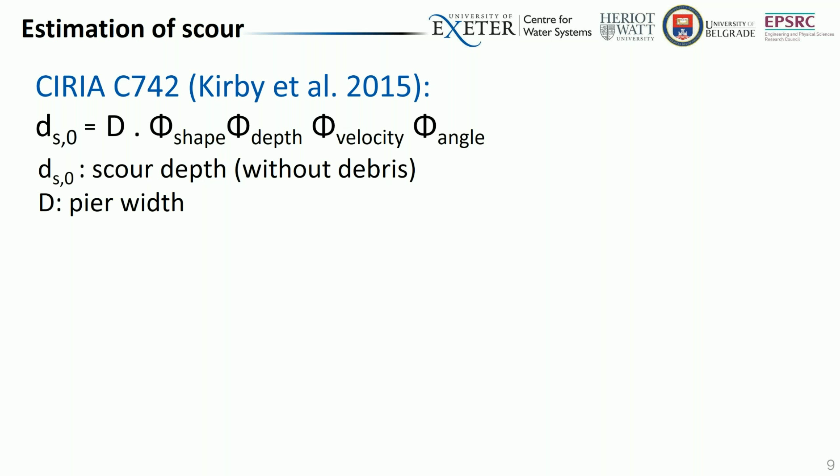So what is notable is that the equation doesn't explicitly account for debris effects directly. It doesn't have a factor that accounts for the increase in scour due to debris. So what is instead done is the pier width is modified to something called an equivalent pier width. So instead of D, we put in a factor of DE, and DE is the pier width that is computed based on some studies done by Melville and Dongol in 1992.

And the weakness here is that it doesn't really account for how long the debris is stream-wise. It also doesn't allow you to assess how much the scour would be if the debris was at a different elevation—if it was not at the top but was partially submerged, for example, or somewhere at the bottom.

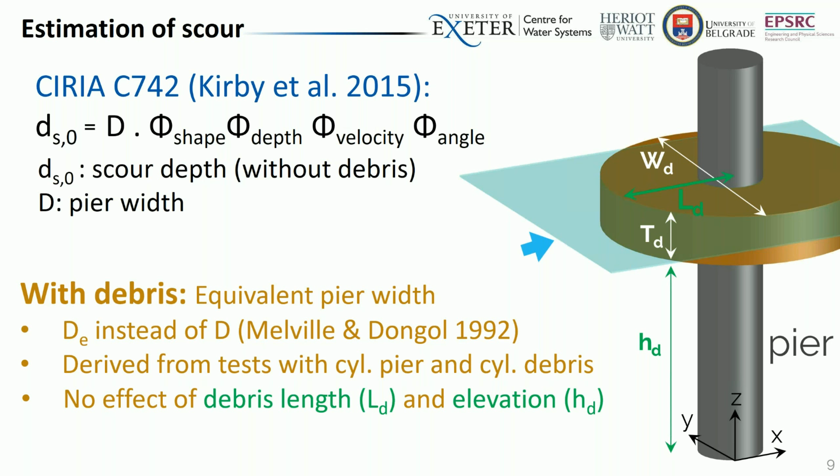So from our experiments, we've tested a number of scenarios and identified the key parameters that govern scour depth due to debris. The factors related to debris geometry are basically debris length, where Ld refers to the stream-wise length; the blockage area, which is how much of the cross-section is blocked by debris; and the elevation of debris, the height from the riverbed to the bottom of the debris. These are the three main factors determining the amplification in scour due to debris.

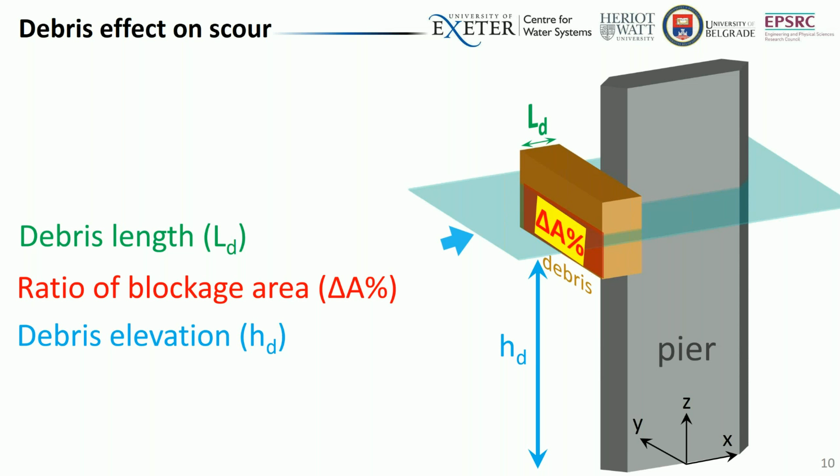Similarly, we also looked at debris on the bed. If the debris is on the bed, understandably it has a protective effect, tending to protect rather than cause more erosion. Depending on the length of debris, you can have an enhancement in this protection effect, and similarly, if the length of debris is 3 times the pier width, the protection effect tapers off after that. So in effect, if you have debris, you could potentially sink it to the bed to lessen its effect.

We've also used data from other studies, not just our own. We understand there are results from other researchers around the world, like Lagasse in the US and Pagliara from Italy, and we are trying to make sure the equations or relationships we put forward are consistent with data from the literature.

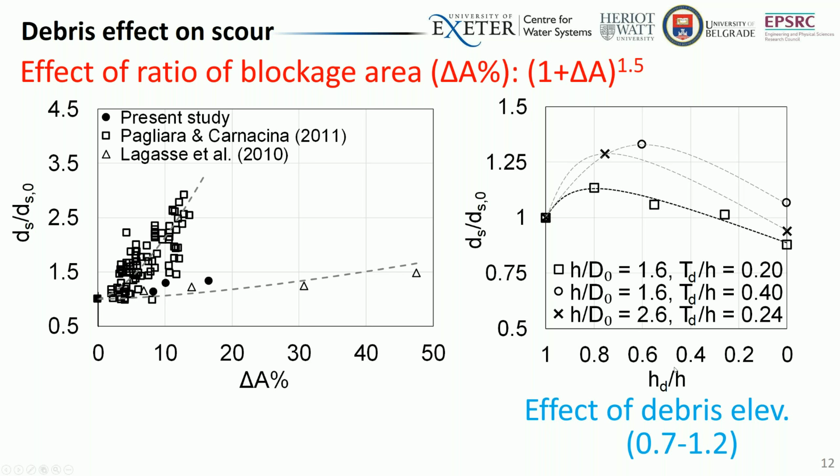These are other plots that illustrate the effects of the blockage ratio and the debris elevation. I'm going to skim over these two since we're very close to the end of the session.

What we are essentially proposing as part of this research is to come up with a debris enhancement factor. We propose including an additional factor in the equation called phi debris, which would effectively tell you how much the enhancement in scour is solely due to debris. Currently we've got a relationship, and we estimate this value based on the three parameters mentioned earlier: debris length, debris blockage ratio, and debris elevation.

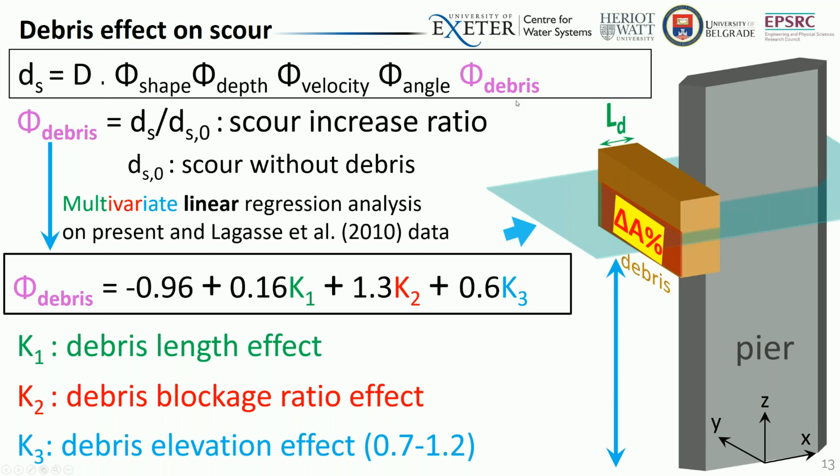So I'll stop here with some quick conclusions. The key thing I'd like to illustrate is that we would like to modify the scour equation to account for debris effects. This is a proposal that came through our industry steering committee, who felt the process shouldn't be changed dramatically, but should be altered in a simplistic, sensible manner to account for debris effects.

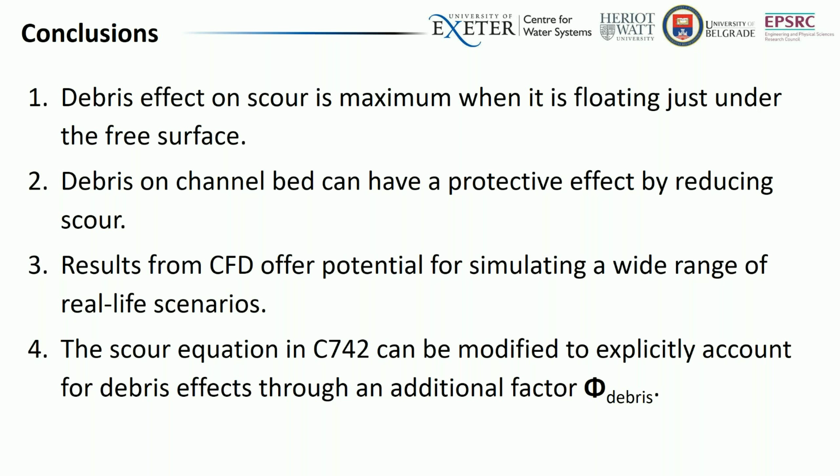What we are doing currently is engaging with a number of industry partners to embed this approach within practice. This is how this opportunity came about, as I approached Owen with what we are putting forward. We are also engaging with other partners like Highways England and Network Rail, to see how we can put this forward within their practices or guidance.

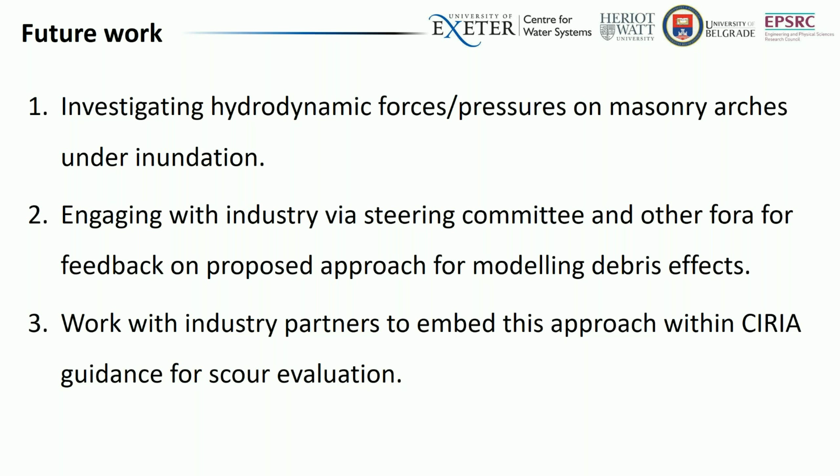I'm done. Thank you very much, Prakash. We've had a few questions.